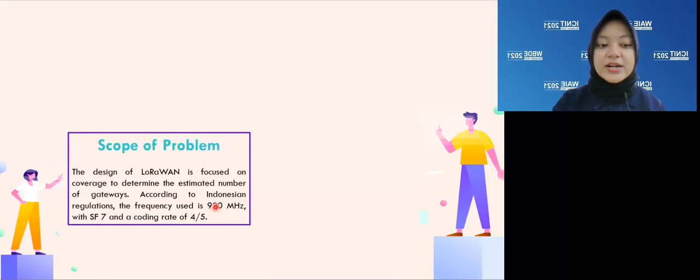In this study, our research is limited according to the scope of problem. The design of LoRaWAN is focused on coverage to determine the estimated number of gateways. According to Indonesian regulation, the frequency used is 920 MHz with spreading factor 7 and coding rate of 4/5.

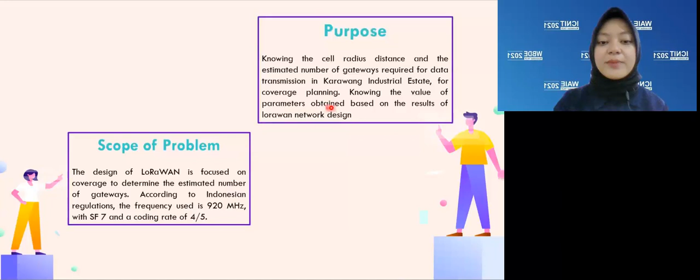The purpose of this study is knowing the cell radius distance and the estimated number of gateways required for data transmission in Karawang Industrial Estate for coverage planning, and knowing the value of parameters obtained based on the result of LoRaWAN network design.

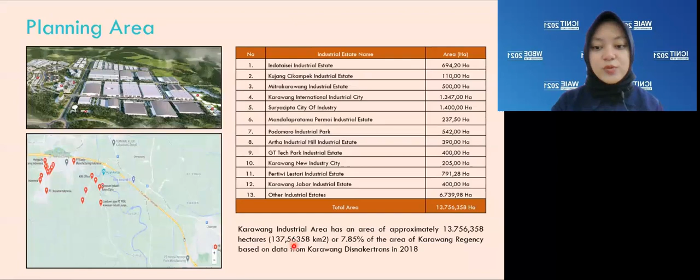Planning area. We chose the Karawang Industrial Area as the study's sample because it is one of Indonesia's largest industrial areas, with a total plot area of approximately 137.56 square kilometers. The map below shows the distribution of industrial areas in Karawang, and the Karawang Industrial Area is divided into 13 areas as shown in the table below.

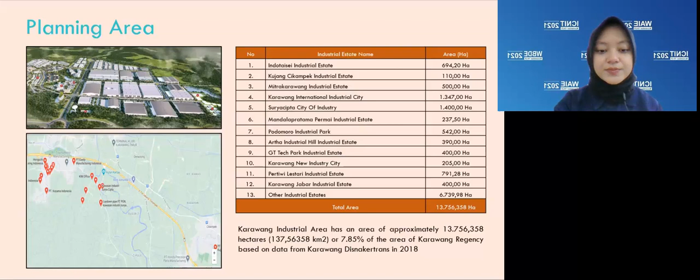As previously stated, the coverage planning method is used for planning. When performing coverage planning, we must also perform some calculations, specifically the calculation of link budget. The link budget value is calculated using these parameters to determine the maximum range of the gateway and the number of gateways required. The link budget is required to determine the predicted signal loss as it propagates from the transmitter to the receiver.

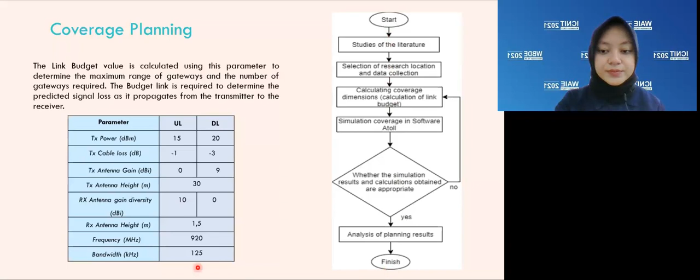Okay, Okumura-Hata propagation model. This LoRaWAN planning uses the Okumura-Hata propagation model, and this propagation model will differ depending on whether the area is urban, suburban, or rural. The Okumura-Hata model is the simplest propagation model and provides the best accuracy in path loss estimation.

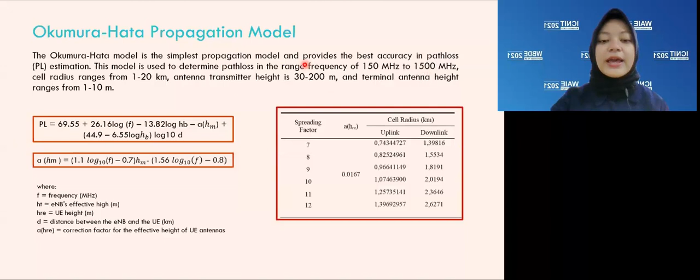This model is used to determine path loss in the frequency range of 150 MHz to 1500 MHz, cell radius from 1 to 20 km, transmitter antenna height of 30 to 200 meters, and terminal antenna height from 1 to 10 meters. And this is the formula for calculating path loss. And these are the values for calculating path loss.

Coverage cell and total gateway. Based on the values obtained from the calculation of MAPL and the propagation model, the next step is to determine the coverage area that could be covered by a single gateway, so it can determine the number of gateways required for the research area.

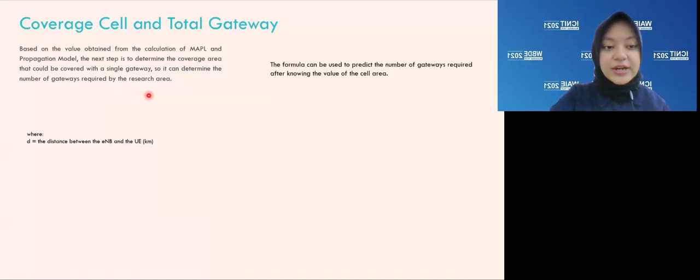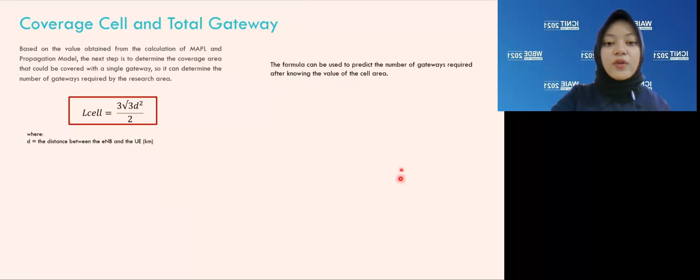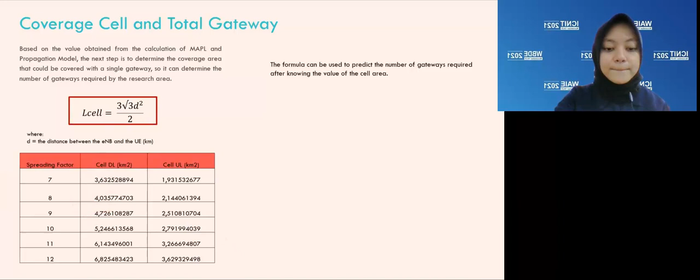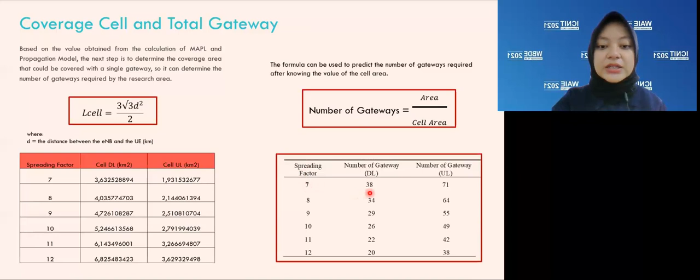Okay, this is the formula for the calculation. D is the distance between the eNB and the UE in kilometers. The formula can be used to predict the number of gateways required after knowing the value of the cell area. Okay, these are the values of the calculation result for the coverage cell. And this table shows that the required number of gateways at spreading factor 7 is 38 in the downlink scenario.

Capacity planning. Because capacity planning simulation is not performed in LoRaWAN, only calculations are performed for capacity planning, one of which is to calculate time on air or TOA. When a signal is sent from a sender, it takes a certain amount of time before a receiver receives the signal. This time is called time on air or TOA.

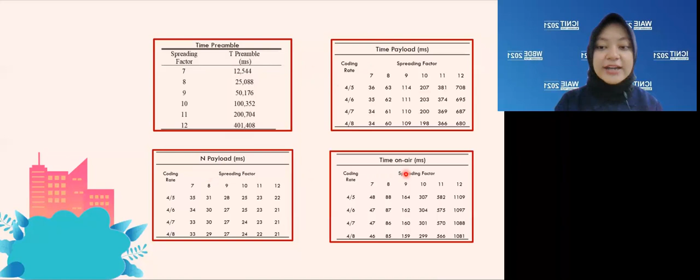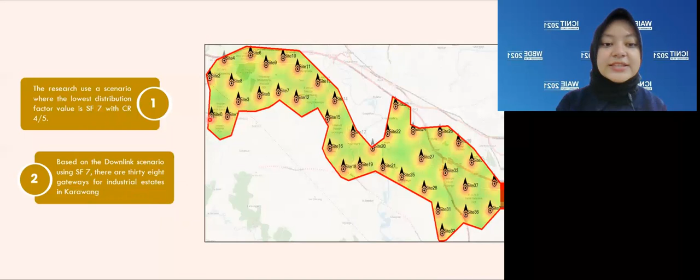The research used a scenario where the lowest spreading factor value is SF7, and based on the downlink scenario using SF7, there are 38 gateways for the industrial estate in Karawang, starting from site 0 until site 37. Results. This contains the parameter values obtained in order to identify the category, ranging from very good to good or very bad.

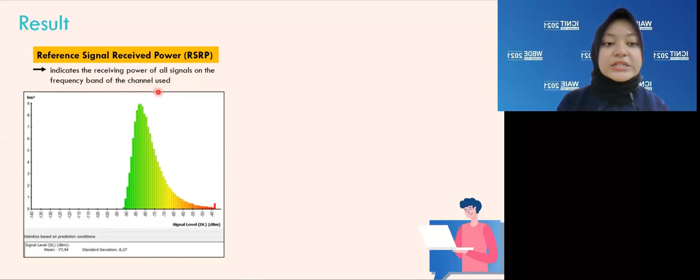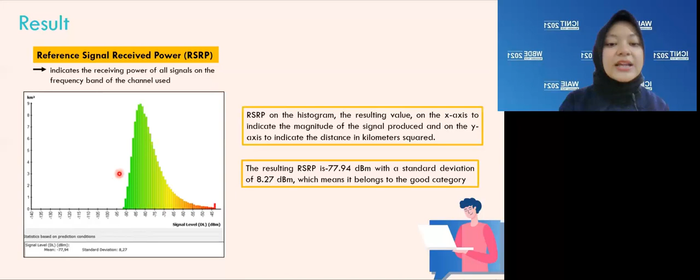First, reference signal received power or RSRP indicates the receiving power of all signals on the frequency band of the channel used. Okay, in the RSRP histogram, the x-axis indicates the magnitude of the signal produced and the y-axis indicates the area in square kilometers. The resulting RSRP is -77.94 dBm with a standard deviation of 8.27 dBm, which means it belongs to the good category.

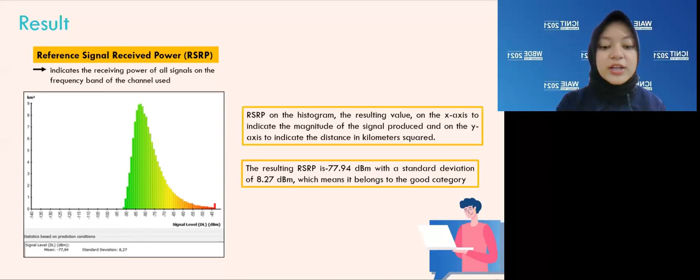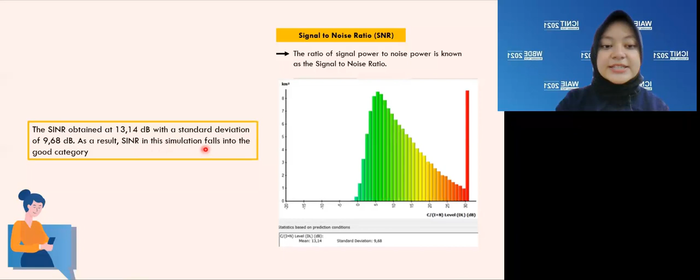Number 2, signal to noise ratio or SNR: the ratio of signal power to noise power is known as the signal to noise ratio. The SNR obtained is 13.14 dB with a standard deviation of 9.68 dB. As a result, SNR in this simulation falls into the good category.

And the conclusion: according to the simulation results using spreading factor 7 and code rate 4/5 for frequency 920 MHz in Karawang Industrial Estate, approximately 38 gateways are required for an area of 137.56 square kilometers. Calculation of time on air or TOA reveals that spreading factor 7 has the smallest TOA, indicating that less time is required. The RSRP parameter value for LoRaWAN planning has a mean of -77.94 dBm, which is considered good, while the SNR parameter is also considered good.

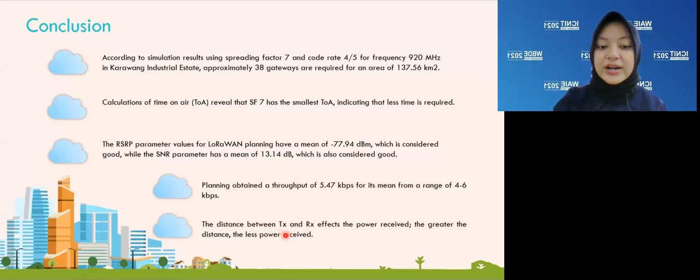Planning obtained a throughput of 5.47 kbps for its mean from a range of 4 to 6 kbps, and lastly, the distance between the TX transmitter and the RX receiver affects the power received. The greater the distance, the less power received. The following sources were consulted while conducting this research.